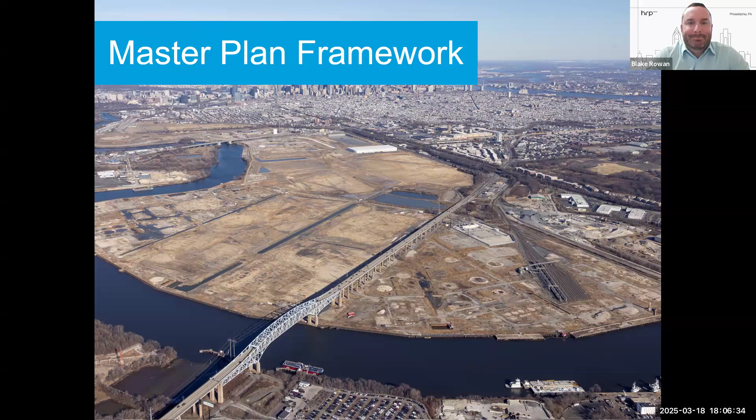So go to the next slide. Just as a quick reminder, our overall development is bifurcated by the PGW site at Passyunk, and really anything north is our innovation campus, which represents about 250 acres, roughly anywhere between 3 and 4 million square feet of future development. And then our industrial campus is everything south of Passyunk Avenue and just north of the Platt Bridge. That's about 750 acres, and it can represent anywhere from 9 to 10.5 million square feet based on future development.

Since our last public meeting, the master plan has remained the same, and we'll continue to update everyone if there's any modifications, and certainly that will be market dependent. Next slide.

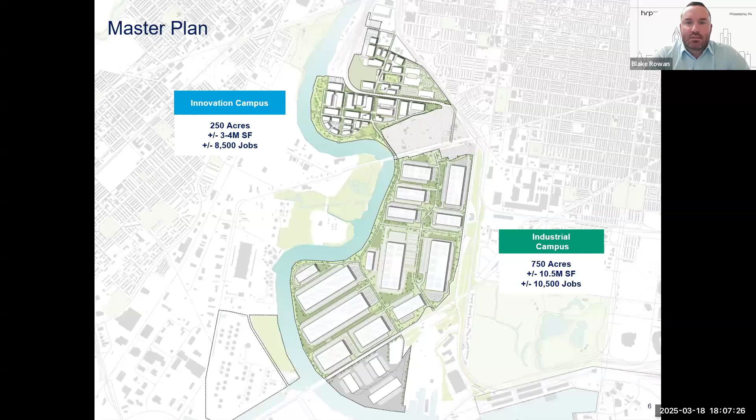Over the last quarter, we've had tremendous progress on the industrial campus. We're nearing completion of the first building, and we've commenced construction of our second building, and we've completed phase 1 of mass earthwork.

This year, we're really going to be focusing on completing phase 2 of mass earthwork on the industrial campus. That represents everything you see in tan on the image to the right. The goal is by the end of the year, everything on the industrial campus will be completed from a mass earthwork perspective, everything out of the 100-year floodplain, and we'll be focusing on vertical development.

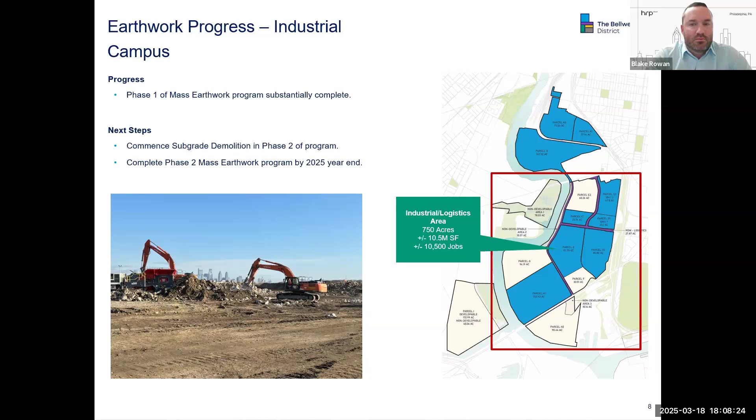This is a vantage point from the Platt Bridge. As you can see, we have our 2 buildings going vertical. You see our Lot 9 site, which represents the ability to place about a 900,000 to 1 million square foot building. We have our Lot 14 site, which is fully completed and ready for vertical development, that would fit about a 1.2 million square foot building. And just in the foreground, you can see the 2 buildings going up in the city skyline.

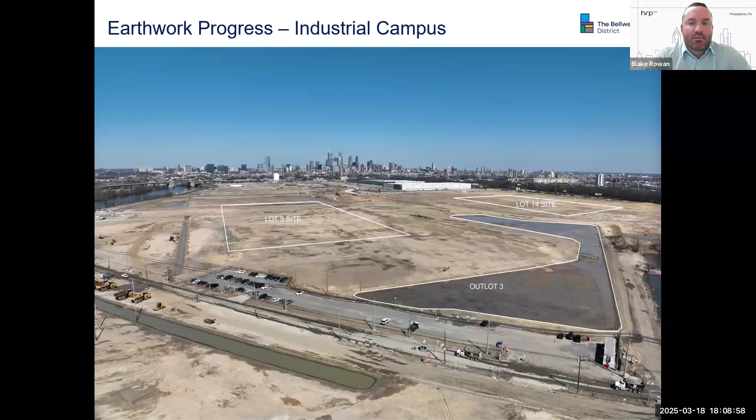This is from the vantage point looking towards the Platt Bridge, almost exactly the opposite direction. Our lots 3A and 3B are complete and ready for vertical development. They represent 2 buildings that are about 680,000 square feet. Our lot 4 is also complete and ready for vertical development, available to fit about a 1.4 million square foot building. Just to the far northeast of the site, that's the start of our phase 2 earthwork that will be commencing in the very near term.

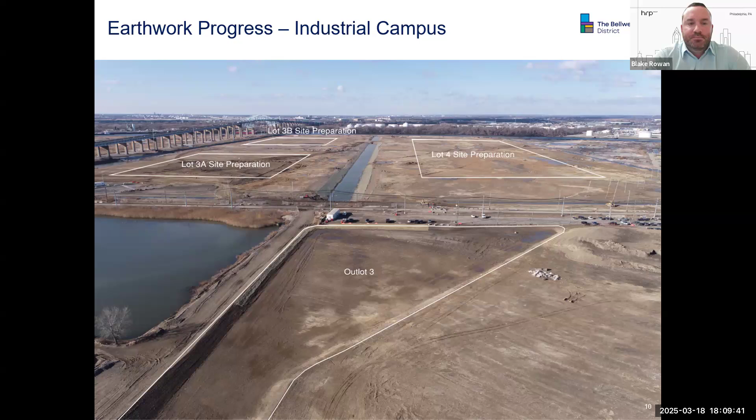As you drive down 26th Street, you've seen quite a bit of work going on with our infrastructure projects. We're very excited to announce we're nearing completion on phase 1 of infrastructure on site. We started paving last week and we'll be wrapping that up over the coming weeks.

On 26th Street, we have all of the subbase down, the concrete subbase, and we'll begin paving around 26th Street. Our goal is by the summer, the barricades you see on the southbound lane will be removed, and the new lane will be opened up to through traffic. That's subject to final approvals with PennDOT and the Streets Department, but we're nearing completion of the construction and we're very excited about it.

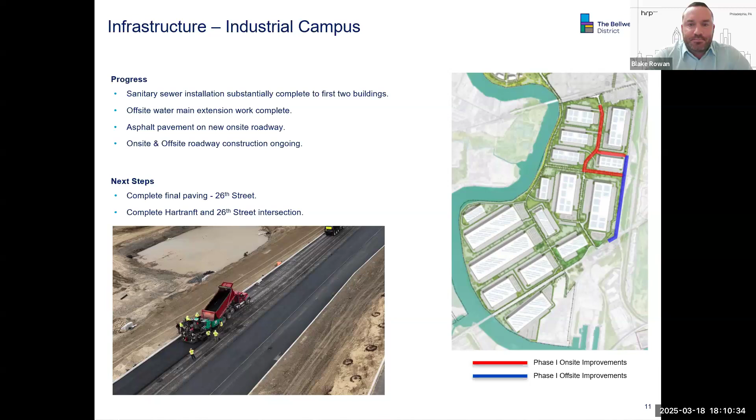Here's an aerial view of that construction. As you see, the concrete subbase is down and we're prepping for the asphalt placement to go.

This is our cul-de-sac at the very north end of phase 1 internal infrastructure. That'll be a turnaround for access for these two first buildings. We'll also have a private road connection as needed. In future phases, our goal will be to connect to Frontage Avenue.

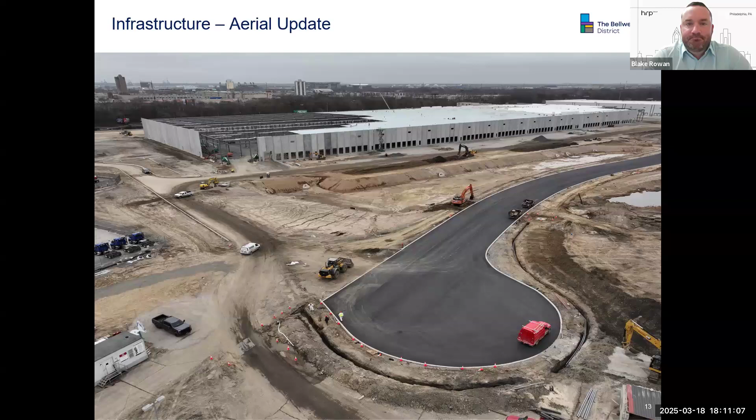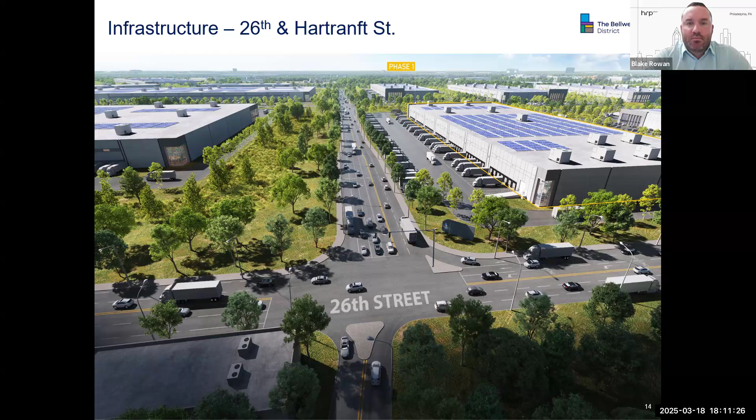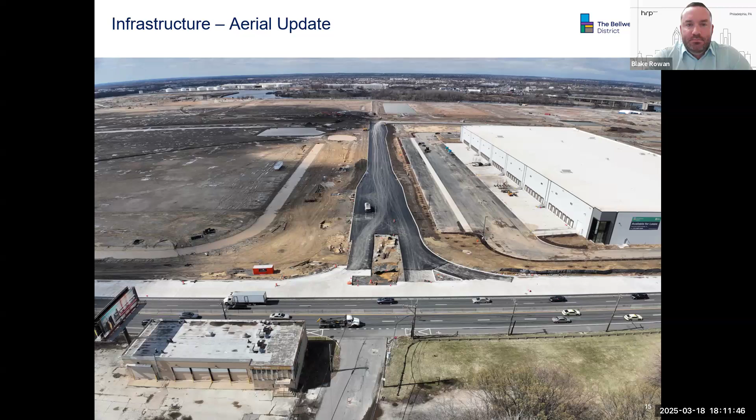Here's our progress from a very similar vantage point. You can see landscaping is finally going in. We're starting to put site lighting down the main roadways, and we'll continue on over the next couple weeks.

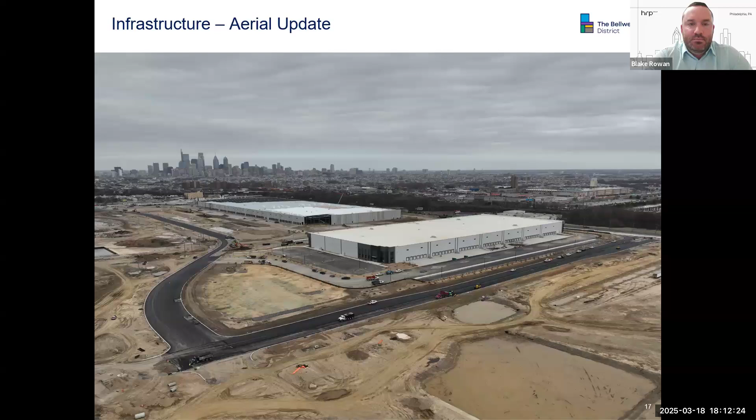Our vertical progress on Unit 1 has been great. We're going through final inspections over the next couple weeks. This building, if you recall, was developed on a speculative basis. It's a 320,000 square foot cross-dock warehouse. We're in active discussions with potential tenants, but it is not currently leased to date. We are eager to bring in a new tenant here in the very near term. We are also working on a speculative office that's just about 5,000 square feet, so we hope to have a product that's turnkey and ready to go.

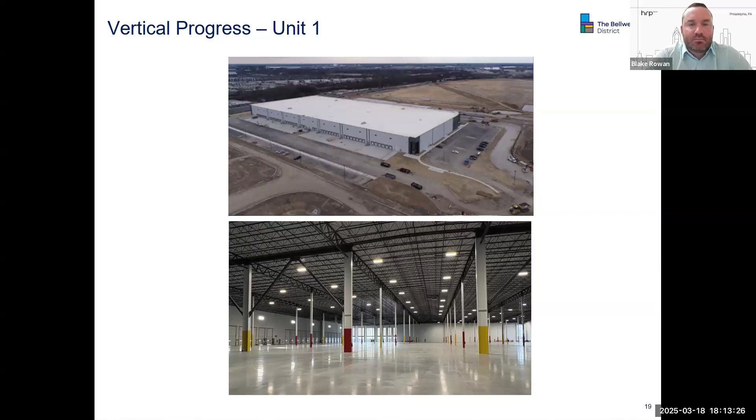So Unit 2, again, this building's about 727,000 square feet, over twice the size of Unit 1. This building is set up to potentially be demised for dual tenant occupancy, so we have a main entrance on both the south and north end of the building.

We commenced construction on this building in October of last year. We've been working as quickly as possible through the winter and have made tremendous progress with our design build contractor, and we've started to place roofing. We are anticipating wrapping this building up in the early third quarter of this year.

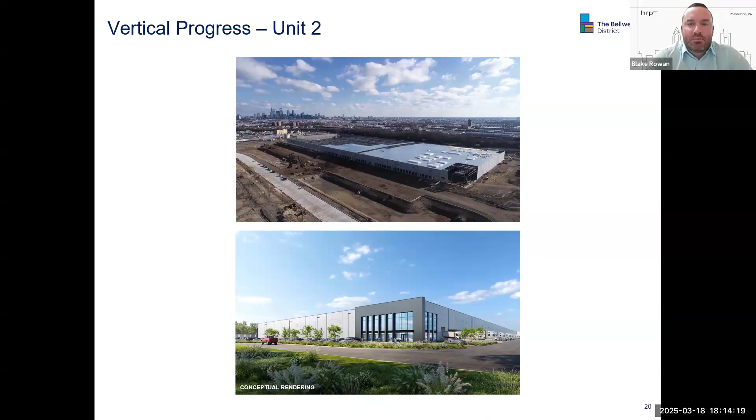This building is also being constructed on a speculative basis. We have active conversations going on with potential tenants, and we hope to bring them to the Bellwether District in 2025.

And then this is just another aerial of some of the progress you can see on the second building. We're very excited to be able to deliver this in the very near term.

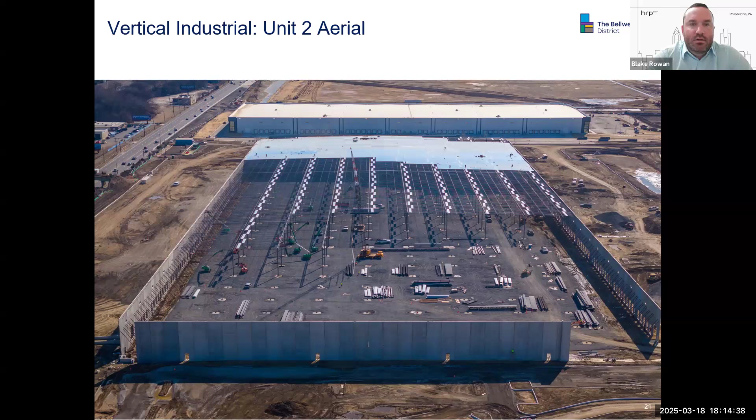Hi, good evening. My name is Amanda Mazie. I'm the Director of Mixed Use, focusing on the Innovation Campus. I'm going to take you through some of our current plans and current status of the campus.

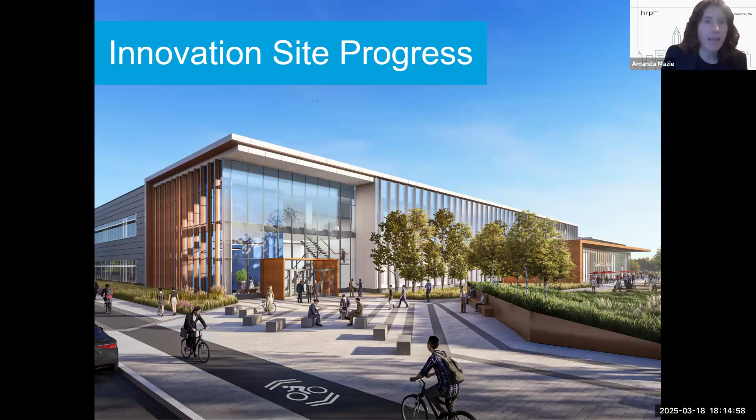This first slide zooms in on the Innovation Campus master plan. Our site is approximately 250 acres, and we're currently planning 3 to 4 million square feet at full build out. Our campus is located just north of Passyunk Ave, south of University City and Pennovation, with direct access to 34th Street and situated directly between the Schuylkill River and I-76.

You'll also hear me refer to parcel A and B. So parcel A is north of the CSX rail that bisects my site, and parcel B is south.

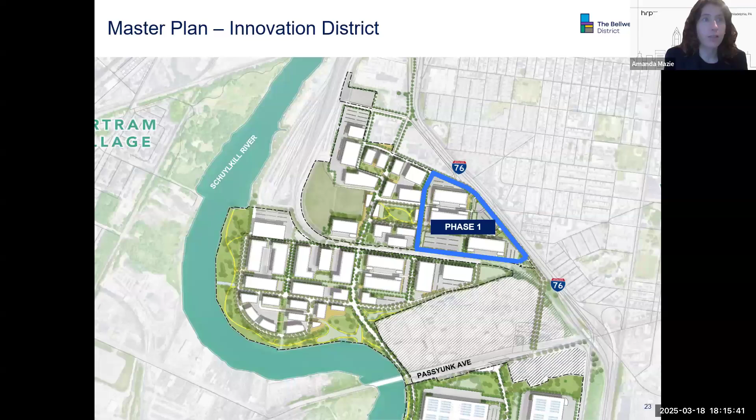Zooming in further, this is our phase 1, which is what we're currently working on for vertical. It consists of approximately 40 acres and 3 buildings, together approximately 500,000 square feet. We chose this as our first phase because it's closest to the existing infrastructure. You can see it's right up against the Schuylkill Expressway with direct access to University City. These first 3 buildings are designed to accommodate biomanufacturing, processing, and production facilities along with tech-oriented uses. Right now, vertical construction is market dependent, but we are targeting Q1 2026.

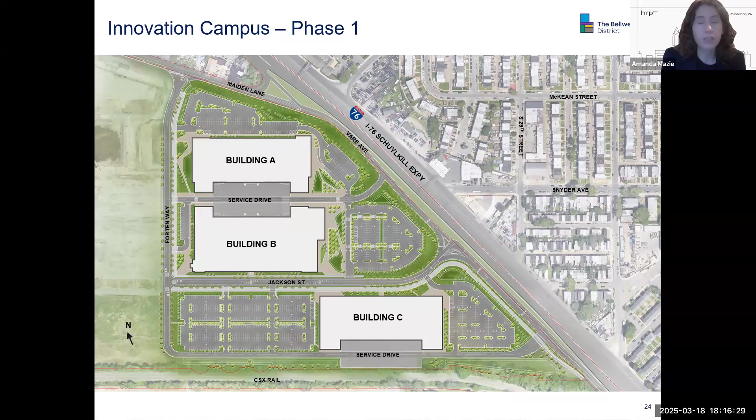So we've spent the majority of last year and this year so far focused on progressing our earthwork activities on the parcel A and B sections of our site. On parcel A, which again is north of the CSX rail, surface and subsurface demolition was complete in December 2024, as well as mass grading last year as well.

And so this year we're focused mostly on parcel B. We commenced surface and subsurface demolition in February. We're approximately 10% complete, and we anticipate being done by the end of the year, both on mass grading and any surface and subsurface demolition.

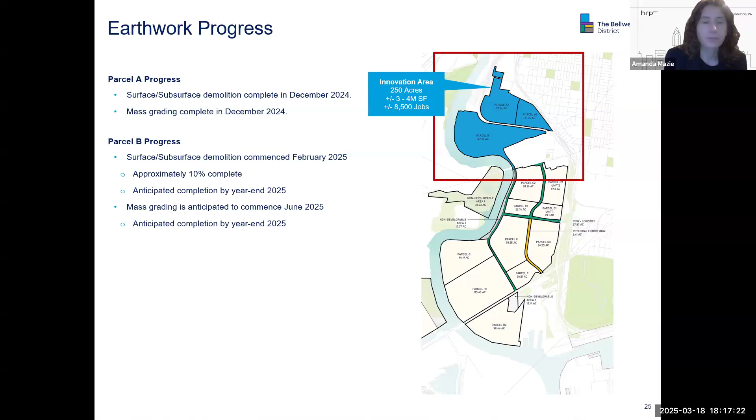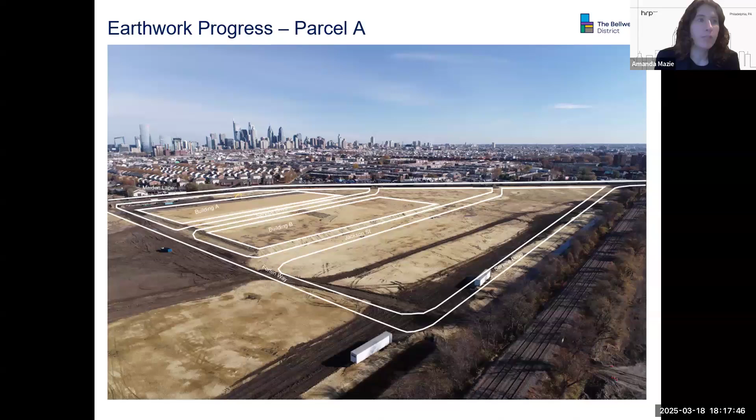This is just an overview of parcel A, looking northeast, showing the finished condition of the mass grading. It also has an overlay of the future roads and buildings, so we have Jackson Street and Forten Way, which are our two interior roads, and then it shows building A and B.

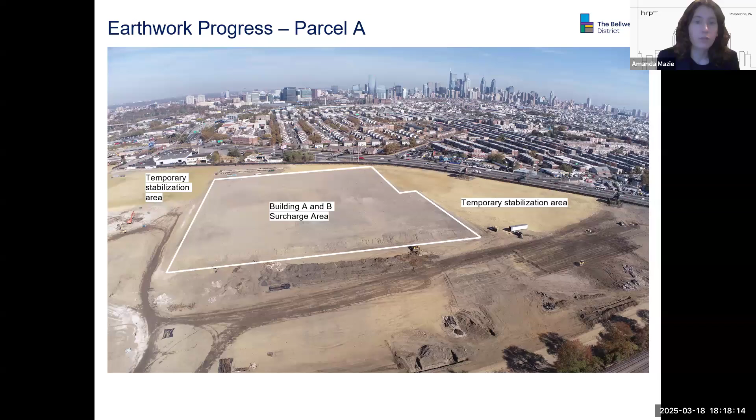And then here's a slightly more recent image showing our surcharge area for parcel A, with buildings A and B, looking northeast. Surcharge is just a method to prepare our site for future vertical buildings. This slide also shows the temporary stabilization areas directly surrounding the surcharge.

And this is just another image, looking northwest, showing the other side of parcel A, and again some more of our temporary stabilization areas.

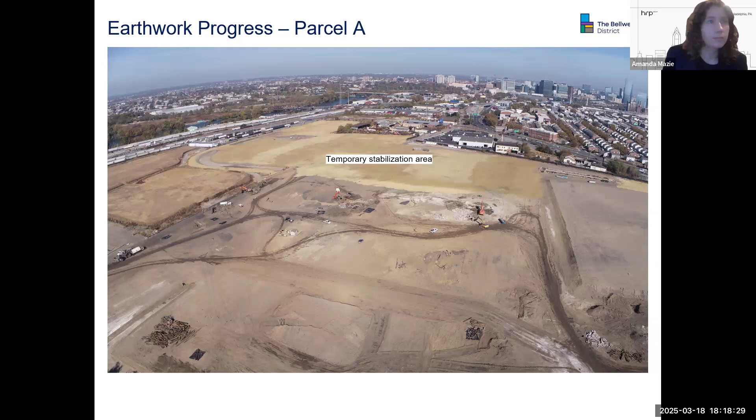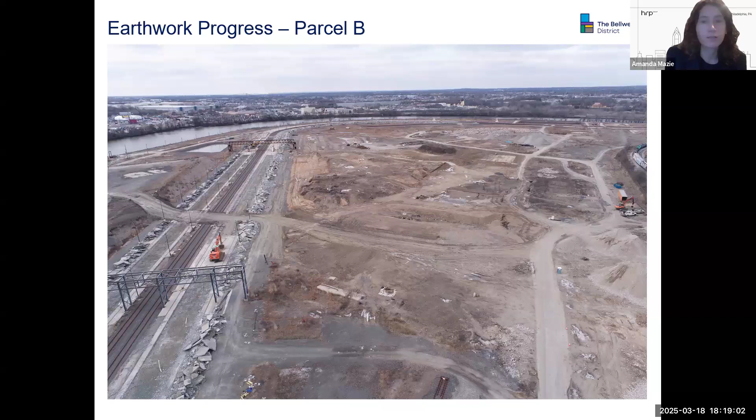And this is just one final image of parcel B, again showing the earthwork contractor starting some subsurface demolition in this area.

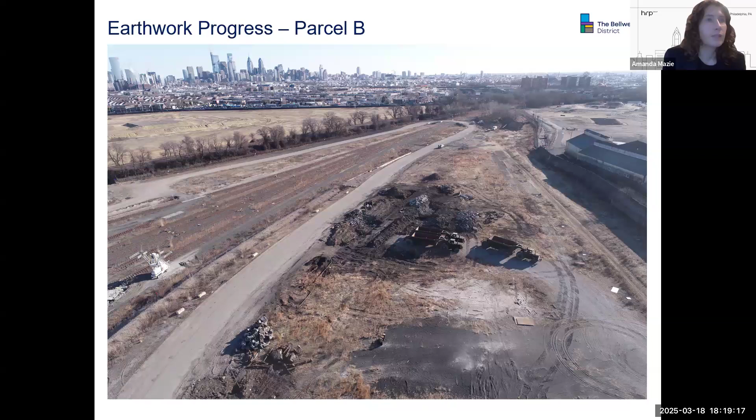And then just some stats on current materials that have been removed from the site to date. We've removed approximately 45 miles of underground pipe from parcel A, and about 7,500 linear feet of underground pipe from parcel B to date. On earthwork volumes, we've completed a movement of approximately 270,000 cubic yards of soils on parcel A, and we anticipate movement of an additional 350,000 cubic yards of soil on parcel B.

For stormwater, over 1.7 million gallons of new or in-progress construction stormwater capacity is being constructed. We've also recycled over 3,800 tons of metal piping from parcel A and over 160 tons of piping from parcel B to date. And in terms of concrete crushing, we've demolished approximately 80,000 tons of concrete, and we plan to reuse approximately 30,000 on site.

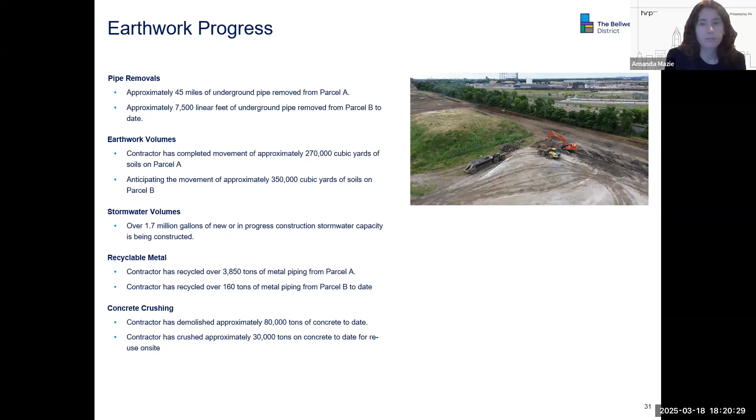This slide is just a few examples of site-wide implementation mitigations that we're employing for dust and odor on site. So we've installed temporary stabilization, including straw, tack, and temporary seed over completed mass grading areas, which we showed in some of the initial slides that I went through. Dust control fabric has been installed on the perimeter fencing.

Perimeter air monitoring is ongoing, with monthly reports being distributed via our website. Water trucks are traversing the site daily to distribute water on haul routes. And then various odor suppression methods are available to be used to suppress and minimize odor as needed. And we do have a phone line and online contact form to report any on-site activity concerns, available on our website.

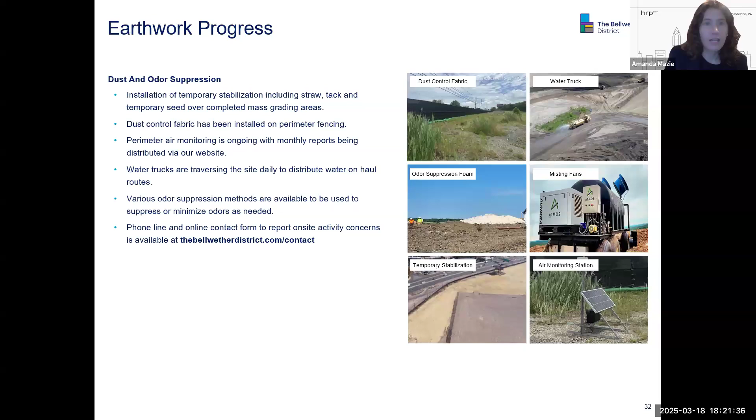And I think this is the last slide for innovation, so we can go to the next section.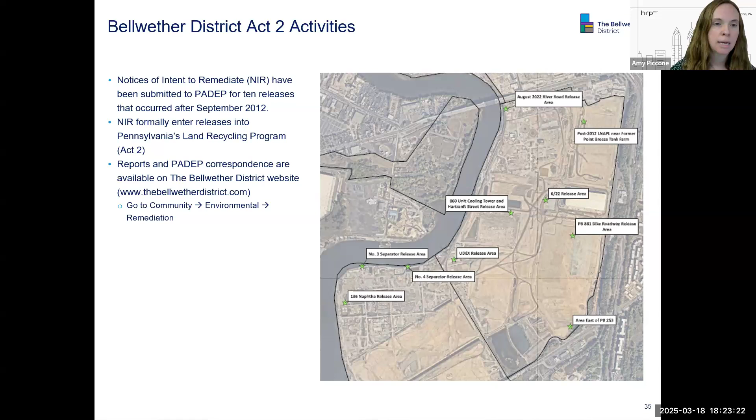And so then that leaves us with our 6th area, the UDEX release area. That's our only Act 2 release area that is currently undergoing active remediation by HRP. That release is related to an underground pipe that leaked in 2018. We're currently using soil vapor extraction, or SVE, and air sparging to remediate this area.

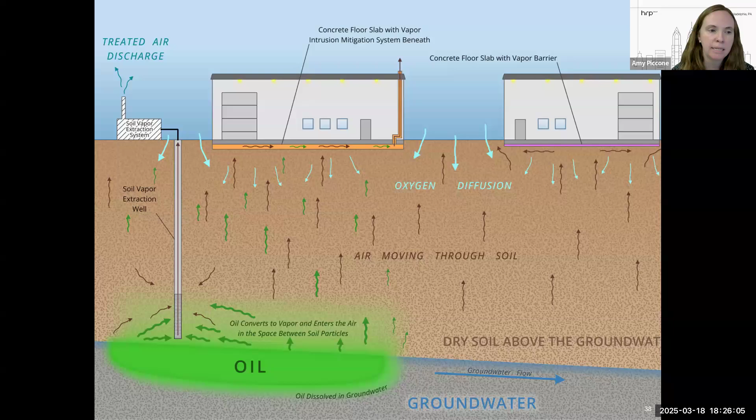Our reports and regulatory correspondence are available on our website under community, environmental, and then tank closure.

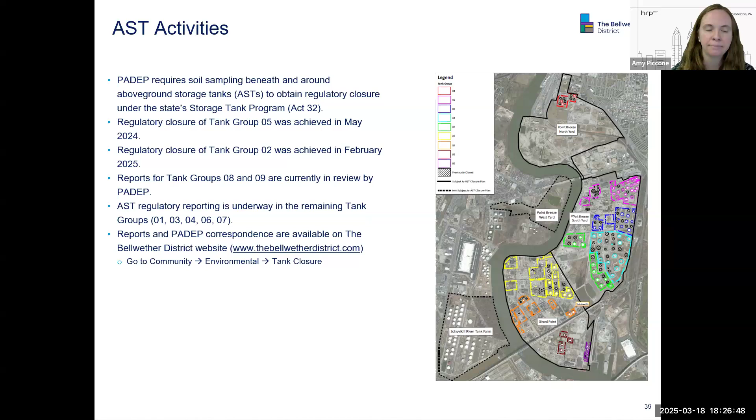For soil movement, we have a soil management plan approved by PADEP in 2020, available on our website under community, environmental, and then soil management. The document outlines our plan to collect one sample per 2,000 cubic yards of soil, categorize that given cell based on analytical data, and handle that soil appropriately during earthwork. For example, most contaminated soil should be placed where it will be under a building pad or a parking lot.

The majority of this soil sampling is done, and the data are summarized in soil management plan addenda, which are on our website. Additionally, we have an environmental consulting company out here every day overseeing the earthwork to make sure the cells are placed in accordance with our soil management plan.

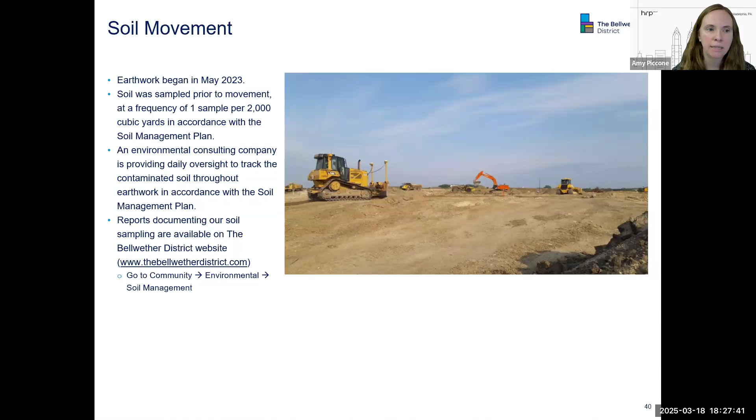And with that, I turn it back to Leah.

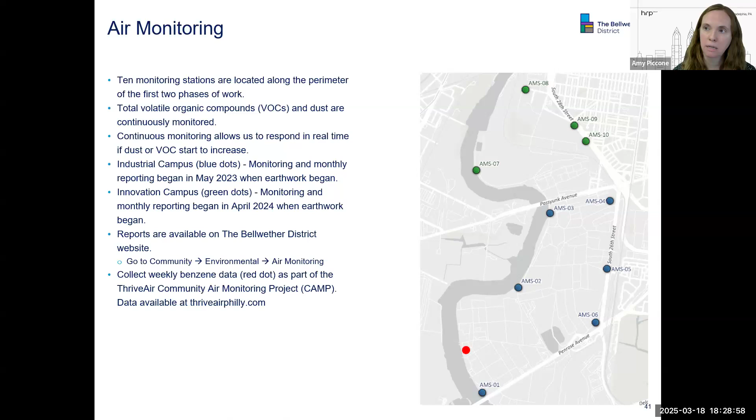So I'll end our presentation by sharing some highlights on our workforce development efforts. Next slide, please.

As I mentioned earlier, the Bellwether District is projected to create thousands of both permanent and construction jobs as we're developing the site. As a point of reference, when the site was an operating refinery, it employed roughly 1,000 people, so this is a huge amount of growth. Our goal is for these opportunities to benefit local Philadelphians, particularly residents that neighbor our project in South and Southwest Philly, so we are currently investing in and will continue to invest in workforce development initiatives.

That will help train and prepare local Philadelphians to benefit from the jobs we're creating both now and in the future. Because the nearest term jobs we're adding are in the construction space, many of our current workforce development initiatives and partnerships are with organizations working to build a pipeline of local talent in construction. Here are just a few of those partners.

We're a founding supporter of Everybody Builds. Everybody Builds is a collaboration between several developers in the city of Philadelphia, along with industry and trade partners, who are collectively committed to building capacity with M and WBE firms and growing a more diverse pipeline of workers in the construction industry. Build Latino is a program out of the Greater Philadelphia Hispanic Chamber of Commerce that is working to build capacity with smaller Hispanic and Latino-owned construction firms.

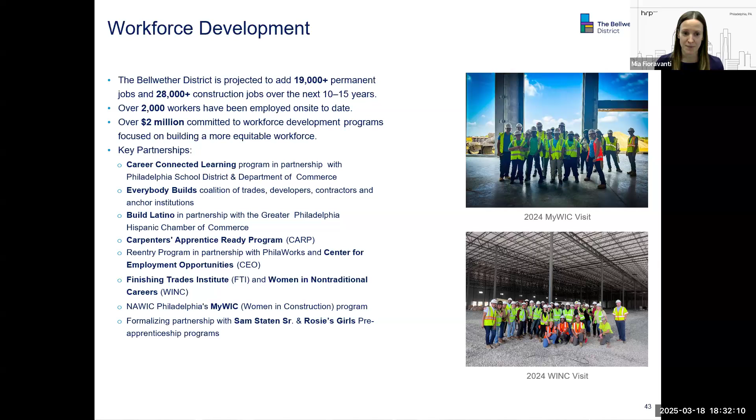We also have a great deal of work focused on exposing Philadelphia high school students to careers in real estate and construction. Through our Career Connected Learning program, we employ 50 interns annually through the Bellwether District or various partners of ours, and to date we've facilitated over 120 positions. We're also regularly engaging students at the Bellwether District for site tours and career awareness experiences, and have carried out more than 25 of those programs to date.